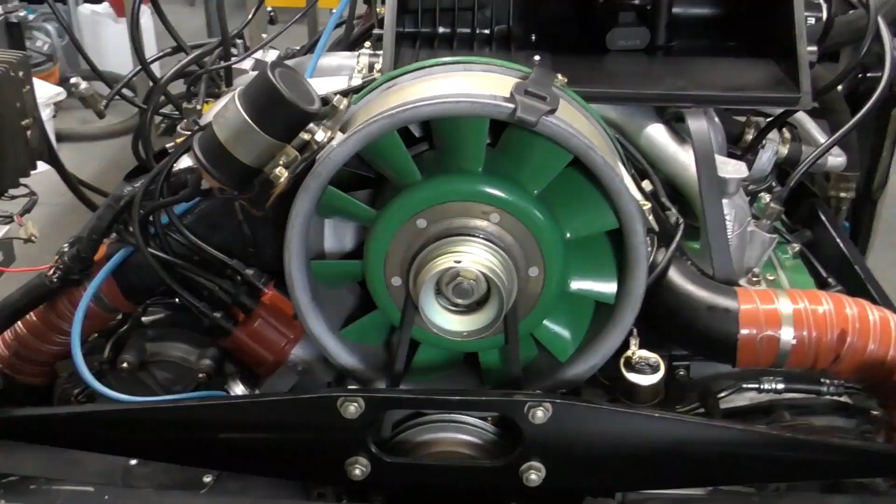So the purpose of this is to show you how to diagnose problems with the CIS fuel system. So a little bit of background, this is an engine that we just built. It is a 2.7 liter engine, and we started it for the first time yesterday.

Now, when you do a first startup, often you're fighting a lot of things, so we didn't want to get too bogged down with the fuel injection system. What we have done so far is the engine is a complete rebuild from the case out. New pistons, cylinders, heads, everything's been machined.

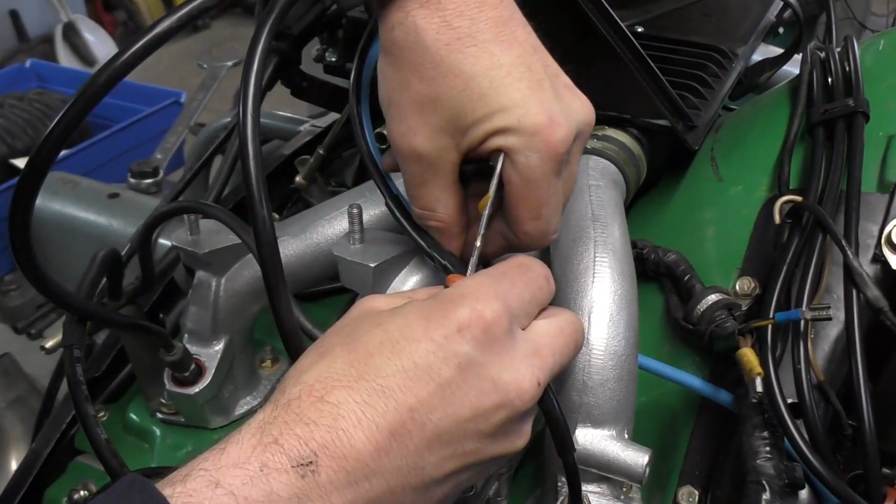The fuel injection system, we've gone through, resealed it, though we haven't had any work done on the warm-up regulator or the fuel distributor. We've set up the CIS sensor plate, our throttle bodies, vacuum lines, and we've also tested our auxiliary air slide. Now, the problems that we had once we got this engine up and running were fourfold.

So, those problems were a high idle. We had a rough idle as well with a partial misfire, popping in the exhaust, and then finally when I tried to lean the fuel mixtures out, the engine running would get worse.

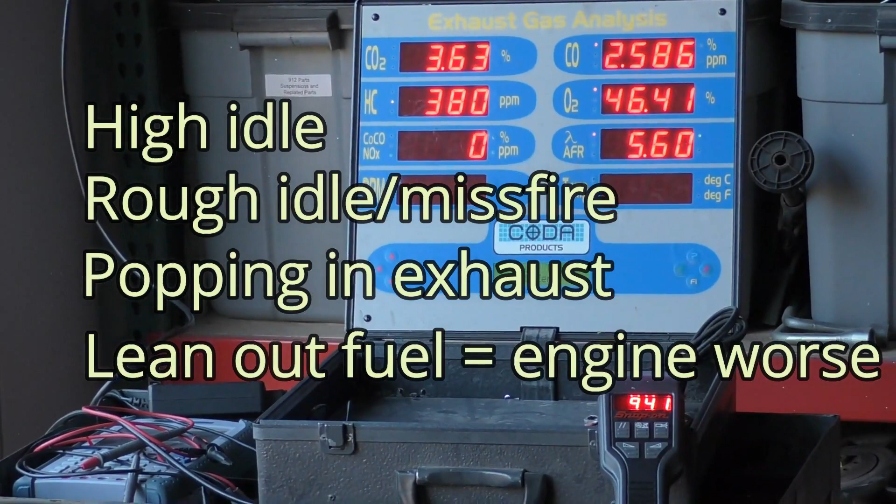So what I did first, because as I said, it is a new engine, but just because it's new doesn't mean anything's right. I identified where our cylinder was on the misfire by cracking our bolts on the fuel distributor. When they're working... No change on that cylinder. If you crack each one at a time, it will drop that cylinder because it drops the pressure to the fuel injector. So we located cylinder number 2 as a problem.

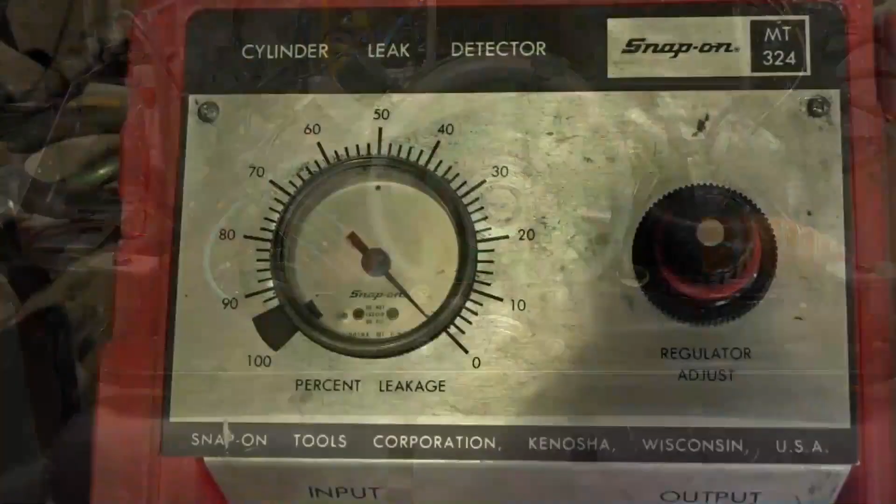We went through the basic diagnostics setup, which is check leak down for engine mechanical first. Leak down pressures were great. They came in at around 6% leakage, which is great for a brand new engine that hasn't even been bedded in yet. Then the next thing I checked was the ignition side of things.

Once again, new ignition cables, new cap, new rotor, that doesn't mean anything until it's been verified. Check the resistance on the plug connectors, check to make sure the wire was plugged in and everything was hooked up correctly, which it was. So what we're going to do today is go through and show you how we're going to chase down the problems and see if we can identify what's causing each problem one by one.

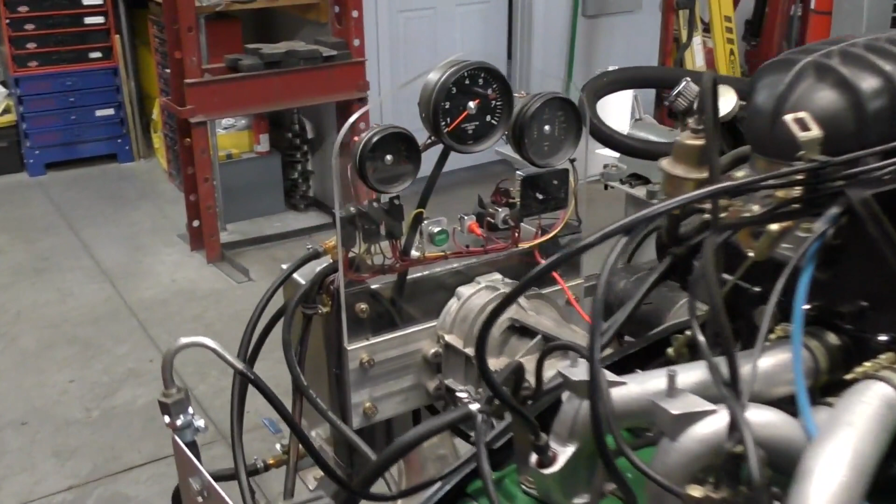So the very basis of the CIS fuel injection system is pressures. And to check our pressures, we need our pressure gauge installed, but we also need to, when you're in the car, run the ignition. Now, on my engine test stand, I have my fuel pump and my ignition system isolated, so I can run just fuel pump or just ignition if I want to. But I want to show you how I would start testing this system as if it was in the car.

So, the first thing that I want to do is have my engine cold, so let the car sit overnight. Then I want to come to my warm-up regulator first. And this is our bimetallic strip heater. I want to go ahead and make sure this is unplugged.

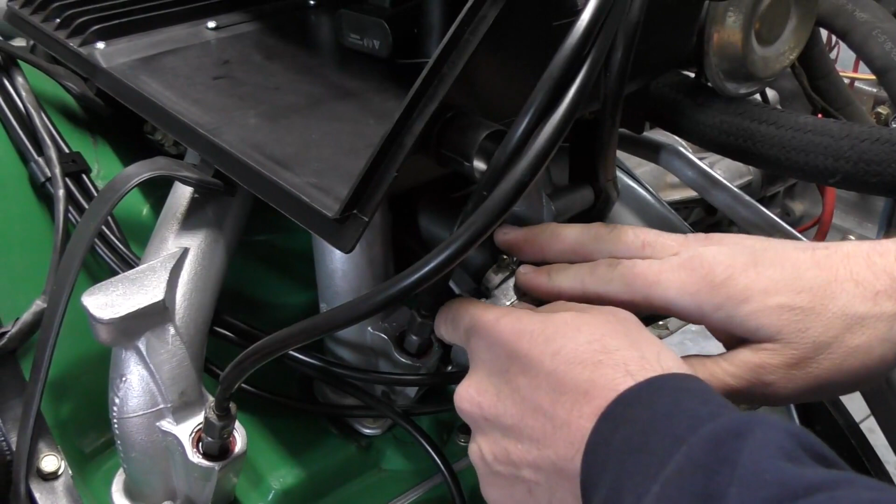Now the next thing I also want to do is come over to my auxiliary air slide, which is right here. Because when you turn the ignition on, this is going to begin heating. And we also had a high idle, so I want to make sure that this component is getting the right power and ground signals. We tested this on the bench. We know it's working correctly. So now we've got to check to make sure that it's getting the right power signals.

So these can be a little bit difficult to get out. I've unplugged it and I'm just going to pull it forward. Now, since I've got these unplugged, I'm going to take the opportunity to test to make sure I've got good power and ground at this plug.

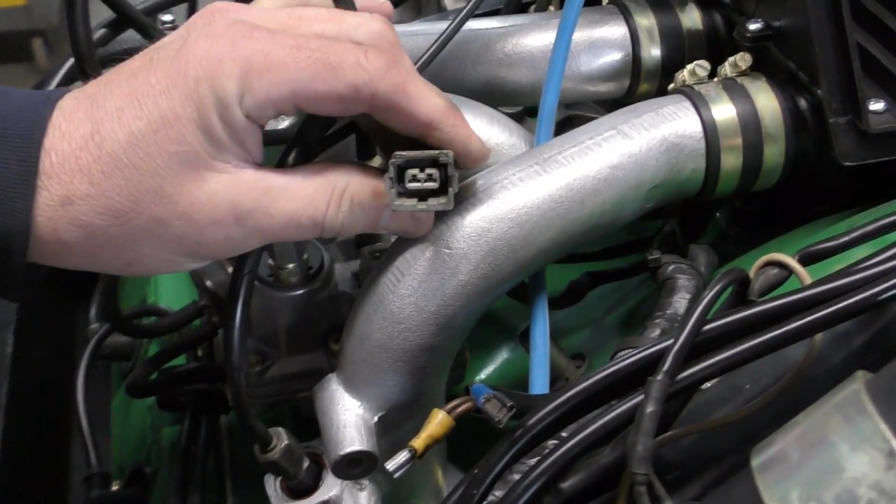There's two ways you can do this. You can use a voltmeter, go across these two terminals, and that'll show you whether or not you have a power and a ground. Or I'm using a little fuel injection tester. This is a standard Bosch LED. Plugs in like that. I'm just going to flick my ignition switch on and it lights up. So I know I've got power and ground at my warm-up regulator. So I'm going to take this over to my auxiliary air slide next and do the same thing.

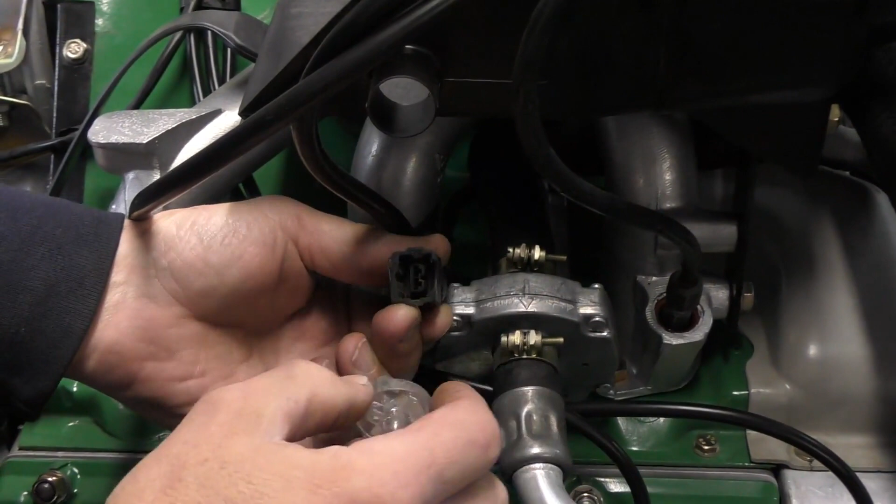And then once I plug this in, we can see instantly that we have nothing there. Now I can also feel that the plug, something's going on, and when I look into the plug I can see somebody's pushed the terminals out. So I'm going to have to pop this apart, see where the wires are. I can feel the wires in the boot, so something's gone on here where maybe somebody stretched this connection, they've broken the terminals and they've come undone.

That will cause our auxiliary air slide to stay open, which will also cause our high idle complaint when the engine gets hot. So just doing that little quick check there, we've already identified one of our possible problems. So I just popped the plug off, and it looks like our terminals have popped out. Possibly somebody trying to yank on this because it's kind of tight in there. There's not a lot of room to work. And the wire stayed still and the terminals came out.

So I'm just going to see if I can find the locking tabs, bend them up a little bit, reinsert, and see if we can get this slide working. Okay, I got them to clip back in. I can see the plugs right here. Grab our little test light and check to make sure we got power and ground here. I'm just going to plug in our little Noid light.

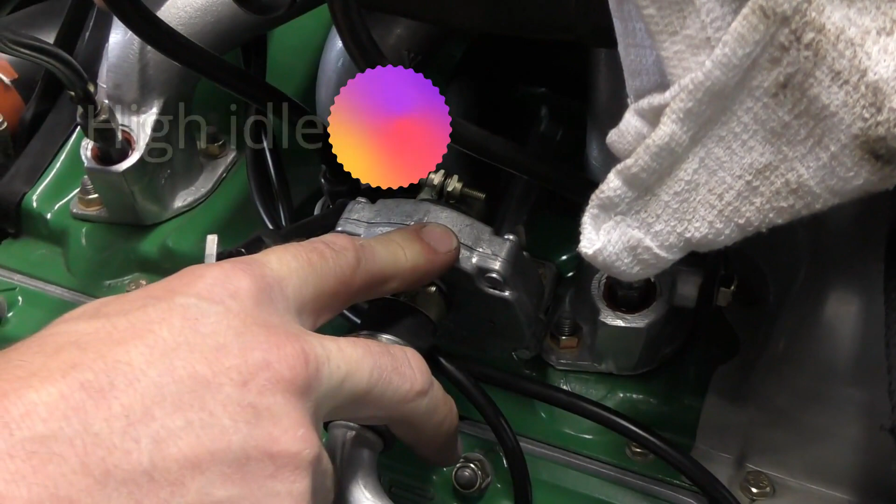And now we've got power at our auxiliary air slide. So this should now power our auxiliary air slide, which will cause the opening to close off the auxiliary air on warm running and should solve our high idle issue.

Before we start testing our fuel system, we want to identify the warm-up regulator. What we're looking for on our warm-up regulator is the Bosch number. Let me just pull this off of here to make it easier to see. The number is stamped or cast into the warm-up regulator. The first number, the 0438140, represents a warm-up regulator.

The number that we are interested in is the 033. This is going to be the model number of this warm-up regulator. This can be used on several different engines, and there is also often 2 or possibly 3 different warm-up regulators based on supersessions. But we need to know what this number is so we can compare it with our graphs.

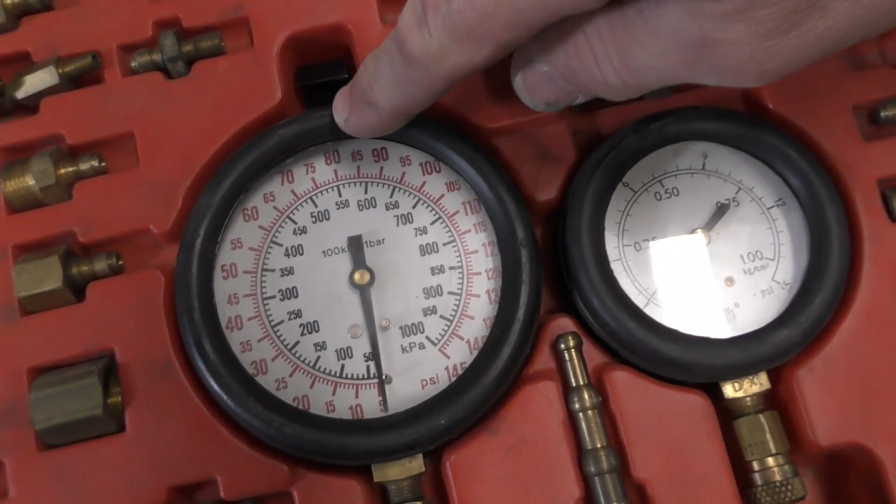This is the fuel pressure gauge tester that we use. This has a lot of different adapters that will do different vehicles, different hose kits, 2 different pressure gauges. This is our pressure gauge that we will be using. These systems run approximately a 70 to 75 psi fuel system, or 5 to 5.5 bar. So you need to make sure the gauge is going to go up to at least those. Generally I want to be using this top part of the gauge. It also comes with another lower gauge and a bunch of different connectors.

So we're going to connect our fuel pressure gauge in between our fuel distributor and our warm-up regulator. Now you can connect at either end, it doesn't really matter. I'm going to go in right here at my fuel distributor. So I'm just going to crack the top line here. You want to make sure if the car's been run that it's been able to sit for a couple of hours so it cools down. Also want to be careful when you unscrew it that there's no residual fuel pressure. It might spray, in which case cover it with a shop towel.

So I'm just going to unscrew this line. So I'm going to attach an adapter fitting into our warm-up regulator line, and then we'll grab a wrench and tighten this down in a second, and then I'm going to pull this adapter out so I can slide my long adapter in to the top of the fuel head.

So when I connect my fuel pressure gauge connection right here, I'm going to tee off to my actual pressure gauge. You want to make sure that you have a tap, and the placement of this valve is very important, because to be able to check system pressure and control pressure, we need to be able to shut this off to check system pressure and then open it to check control pressure.

So when I plug this in, the pressure test port needs to be closest to the actual fuel distributor, and then the warm-up regulator side is going to be on the shut-off valve side. If you reverse this setup, when you shut this off to check system pressure, it will actually only show you whatever control pressure you have. So that's one tip you got to kind of watch.

So before I get started, I've spilt some fuel in this area. I'm just going to take my compressed air and blow that fuel away. It'll evaporate pretty quick. Now we want to make sure when we're testing we don't have any fuel leak from any of our adapters, so I need to eliminate any issues of fuel right there.

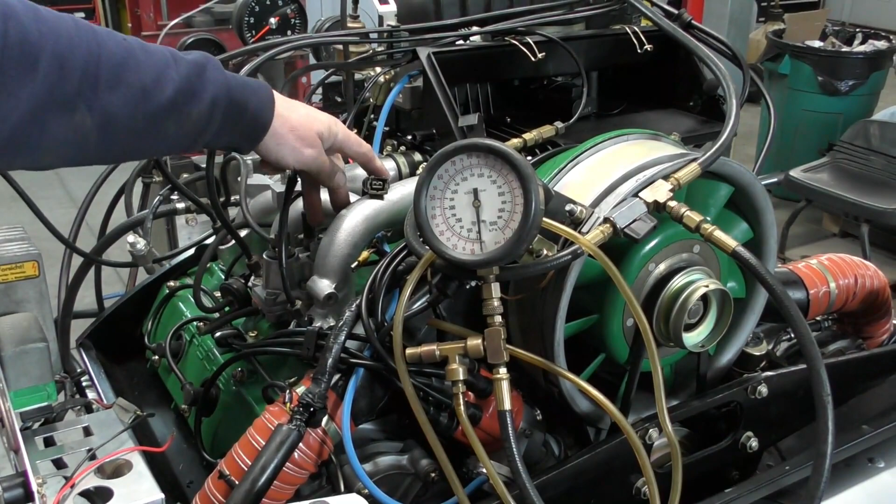Throughout the entire test on a warm-up regulator, you need to make sure that the electrical connector is disconnected. Otherwise, it'll be changing our fuel pressure. Now, the next thing I'm going to do is I'm going to take my Raytek temperature gun, and I need to get an accurate measurement of what the actual warm-up regulator measures. And I've set it to degrees C, just because all of the Porsche information is in degrees Celsius.

So right now it's 17.8, so I'm going to call it 18 degrees C, which should be your ambient air temperature. But it's very important that we need to know exactly what it is, because we're going to compare it to our tech information that has a graph to where the fuel pressure should be.

So next I've gone to our shop manual, and just to show you, each different warm-up regulator number has a different graph. So this is why it's important that we identify which one we're working with. So on this one, we are on a 76 2.7 liter engine, so I'm covering 76 and 77 models. It'll give the factory Porsche numbers here, followed by the Bosch service numbers. So the number we're looking for is 0438140033, so that's our warm-up regulator.

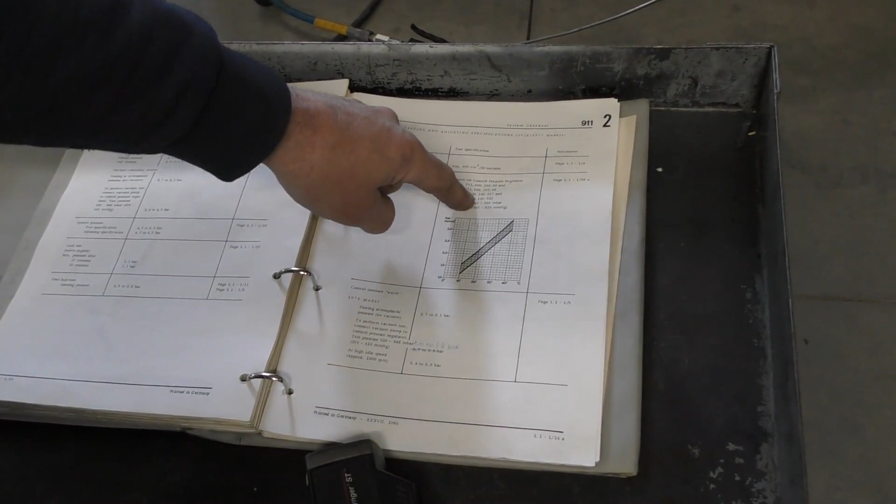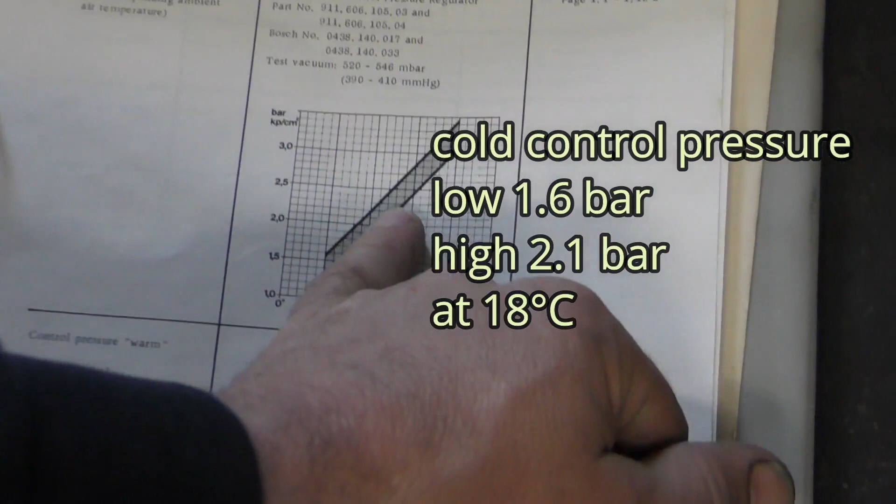We have taken our temperature using a Raytek temperature gun at 18 degrees. So if we come to our graph, follow it up, it's going to show on the low side and high side. So there's a pressure range that we can be in. On the low side, we are looking at about 1.6 bar. On the high side, we are looking at around 2.1 bar. So we're going to run our fuel pressure test first and see what our warm-up regulator comes in at.

So I'm just going to run my fuel pump, let our pressure build, and right now we are running at about 1.3 to maybe 1.35 bar. So we're actually running on the rich side for our warm-up regulator cold for the temperature that it should be. So the lower the control pressure, the richer the engine will be.

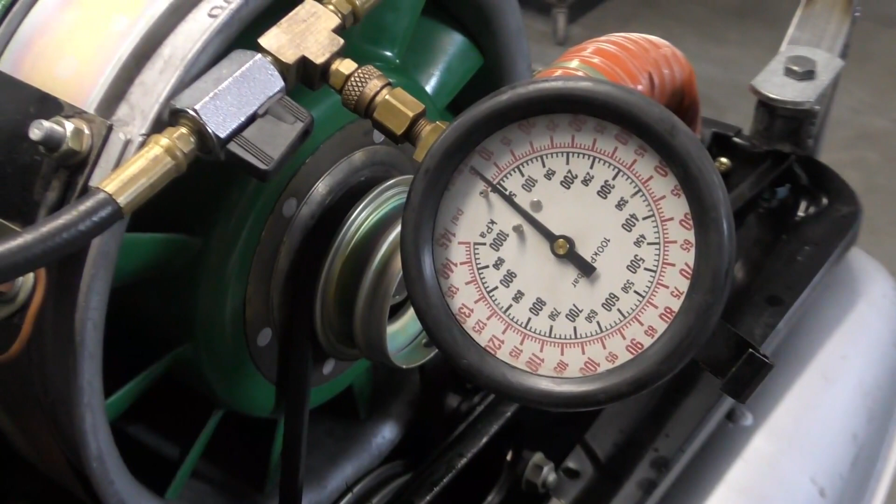The control pressure is working on top of our piston on our fuel distributor. So the amount of pressure in this line dictates how much that sensor plate will lift and how much fuel will actually be injected into the engine. So when the number is really high on our warm-up cycle, that will create a lean misfire or a lean engine. If the number is really low, it will create a richer running engine.

So these are calibrated numbers. There are some small adjustments that can be made, but I don't recommend it. We can usually lower pressure by dropping this center pin, but usually it's better just to have this unit repaired.

Next thing I want to check is my overall system pressure. So to do that, I'm just going to close the valve. My system pressure is coming in at just under, it's about 5.3 bar, and we'll check it against the spec, but that sounds about where it should be. And I'll open this, it should drop straight back down to my control pressure, 1.3 bar.

The next thing that we want to do is we want to check to make sure that the hot running pressures are within range. Even though we know the cold pressures are not in range, it's on the rich side. And you may also make a decision if the car starts and runs well, if the hot pressures are all good, then you may leave it that way.

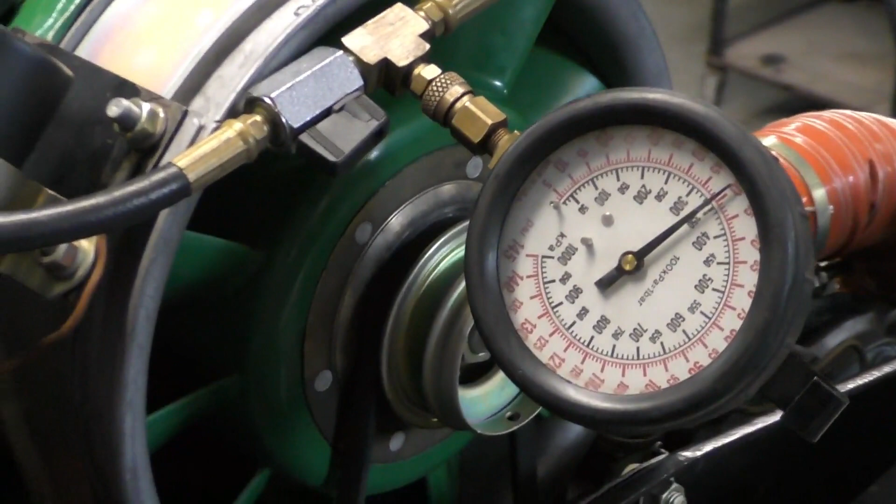Minute and a half, we're at 3 bar. Two minutes at 3.5. Okay, looks like it's stabilized at 3.5 bar or 50 psi. We've been 2.5 minutes, so we're pretty much right there, coming up to the 3-minute mark right now. We're going to leave it connected and just make sure it doesn't climb any further, but it looks like it's pretty well stabilized. That's 3 minutes.

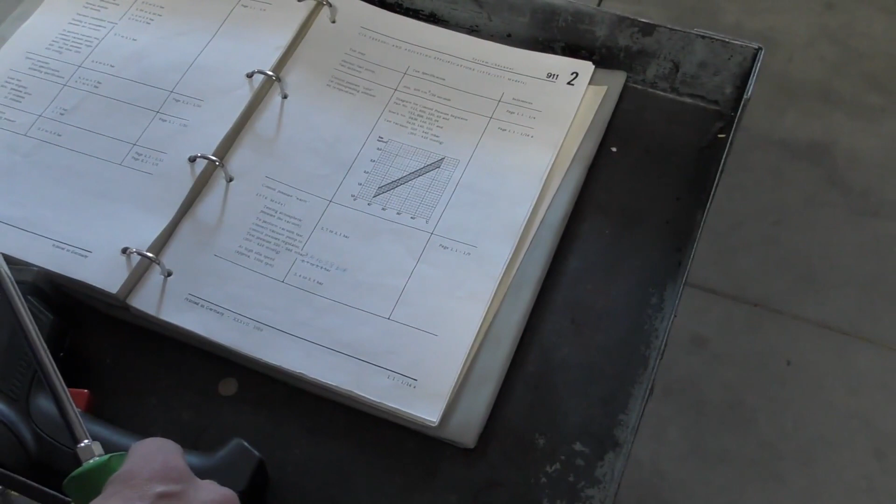So testing without vacuum, we should be, no vacuum, 2.7 to 3.1 bar. So the warm-up regulator is actually a little bit higher. It's coming in at 3.4 bar, 3.5 bar, so it's about 0.4 of a bar too high. That will make it a little bit leaner in that range.

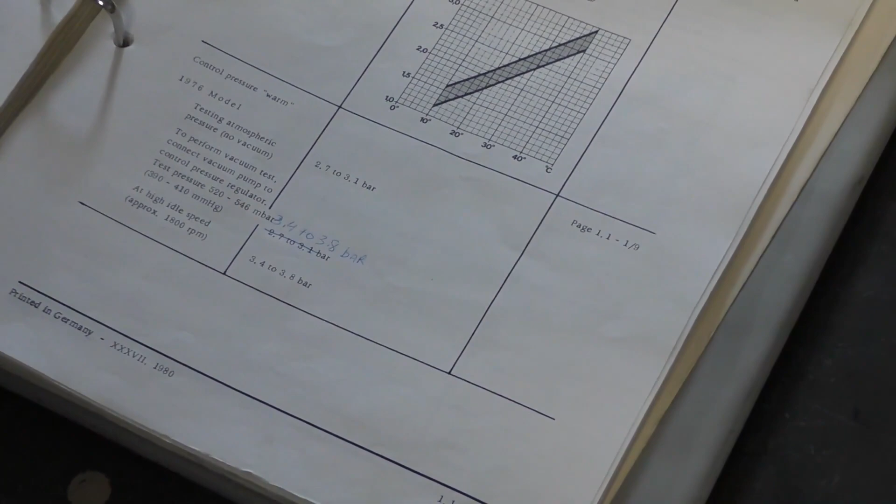So what we're looking at here is what's called rest pressure. And rest pressure is when we shut our fuel pumps off and the system should maintain a certain amount of pressure for a certain amount of time without completely dropping by the wayside. Now this is measuring a couple of things. It's measuring the check valve or the pressure control valve in the back of the fuel distributor. It's also measuring the warm-up regulator. There's usually an accumulator and a check valve in the fuel pump.

Now on our test stand here we are not running an accumulator. Normally it would be mounted right in front of the fuel filter; we're just bringing it straight from our pump. So what we're measuring here is the check valve in our fuel pump, which is holding nicely, and the pressure control valve in the fuel distributor, which is also holding nicely. And what we want to be looking for is minimum 1.3 bar after 10 minutes, and then after 20 minutes, minimum pressure of 1.1 bar.

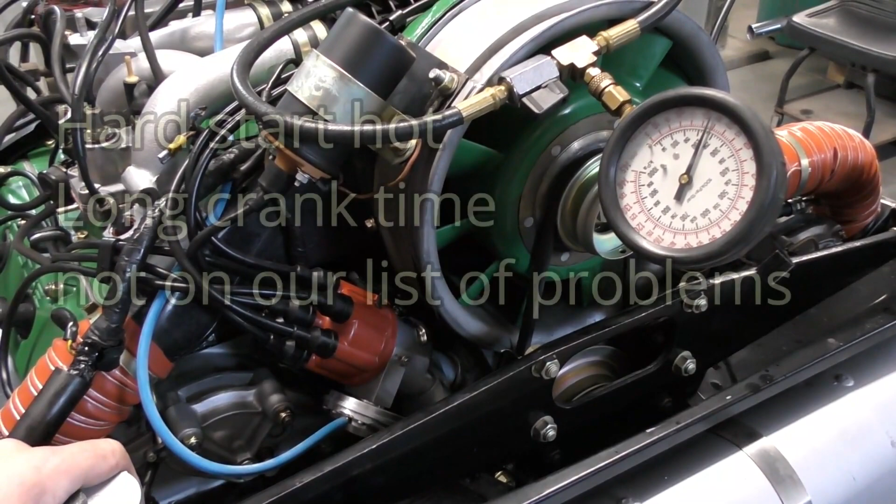So I just took a glance at the clock right now. It's approximately 8 minutes after the hour. So we'll let this sit for 20 minutes and see what our pressures are. Sitting at 10 minutes and we're sitting exactly at 1.3 bar. So far everything's working well.

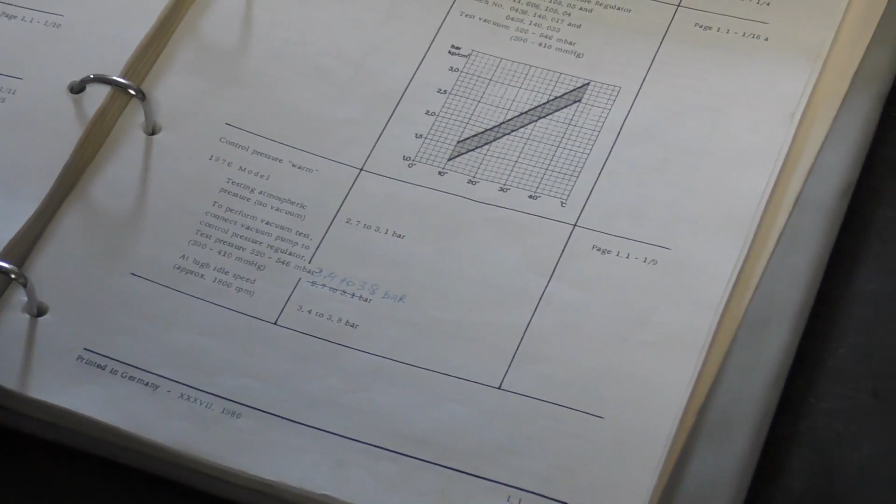The next thing that we need to do is check our pressures under vacuum. So we're going to do a vacuum test and then a high idle speed vacuum test. Now we're going to simulate the engine vacuum by using our vacuum pump, because we're not going to run the engine. You can do it either way. If you don't have a vacuum pump, you can connect everything up and run your engine and get these same results. So we've got two vacuum tests to perform.

We have our ported manifold vacuum on the top, and this one is designed to increase control pressure. It should increase it to approximately 3.4 to 3.8 bar. And this is to lean out the engine at high speed running, where we're not under load so much, we've just got a lot of airspeed moving through our throttle housing.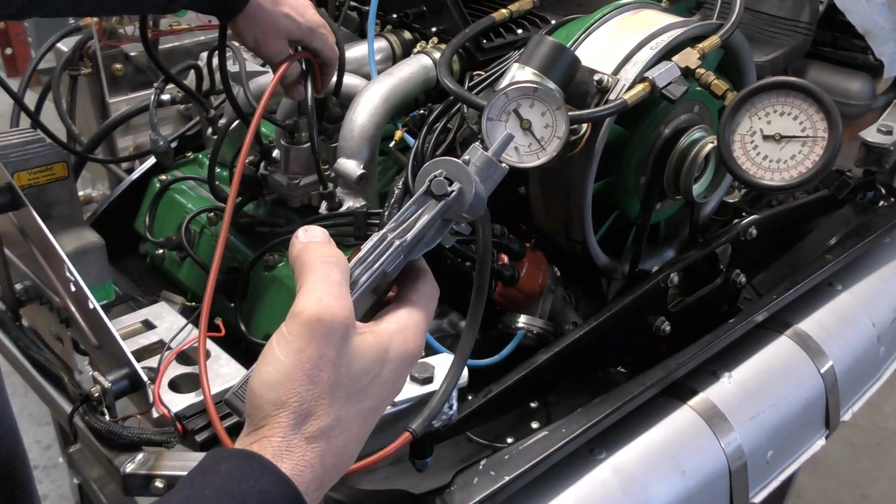So I'm just going to simulate it with my vacuum pump, and as I start to pull it up, you can see our pressure comes up to about 4.5 bar. And our vacuum gauge is also not holding vacuum. It's slowly bleeding off. So that means the diaphragm inside here is not holding. And as our vacuum bleeds off, you can see our pressure slowly dropping.

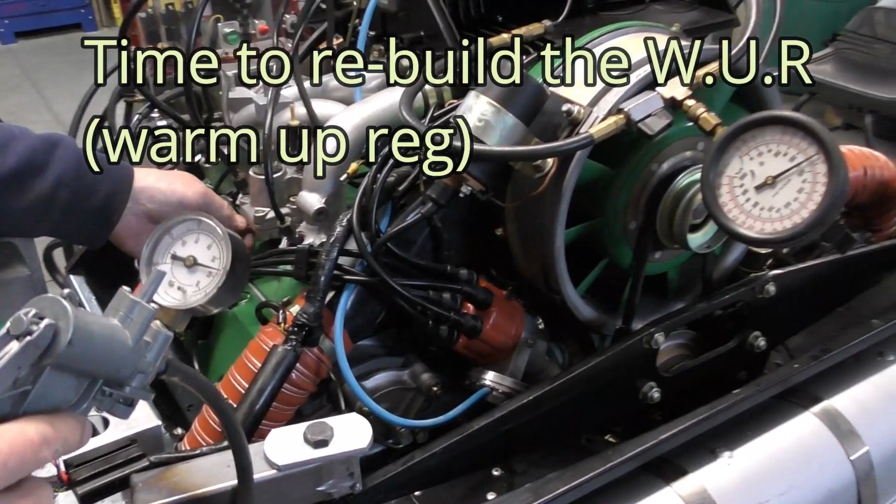Then our fitting down here is an enrichment fitting. So when I give a manifold vacuum signal to here, it should decrease our control pressure, and it's actually making zero change to the warm-up regulator. It is holding vacuum though, so the diaphragm's good. It's probably gummed up or frozen up in there, so it's not moving correctly. So our warm-up regulator is out of spec in pretty much all facets of operation, so it needs to be rebuilt.

So we've gone through and done pretty much all of our preliminary pressure testing, and the one number that is out of spec that we can change is system pressure. And then we can re-look at our numbers and see what effect it had.

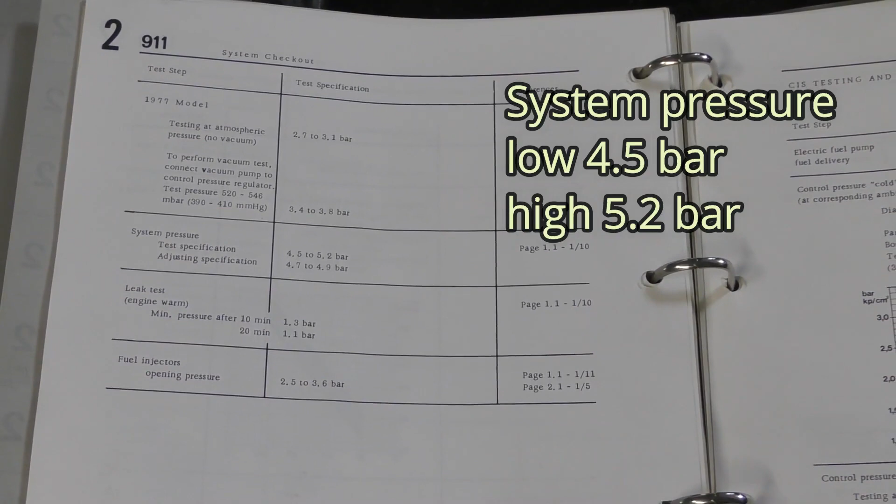So our system pressure should be between 4.5 to 5.2 bar with an adjusting specification of 4.7 to 4.9. What that means is if you measure the pressure and it's 4.5, then that is totally okay. You don't need to make any changes. If you measure the system pressure and it's 5.2 bar, that's also totally okay. But what they would prefer is somewhere between 4.7 and 4.9 bar. So let's look at how we would adjust our system pressure.

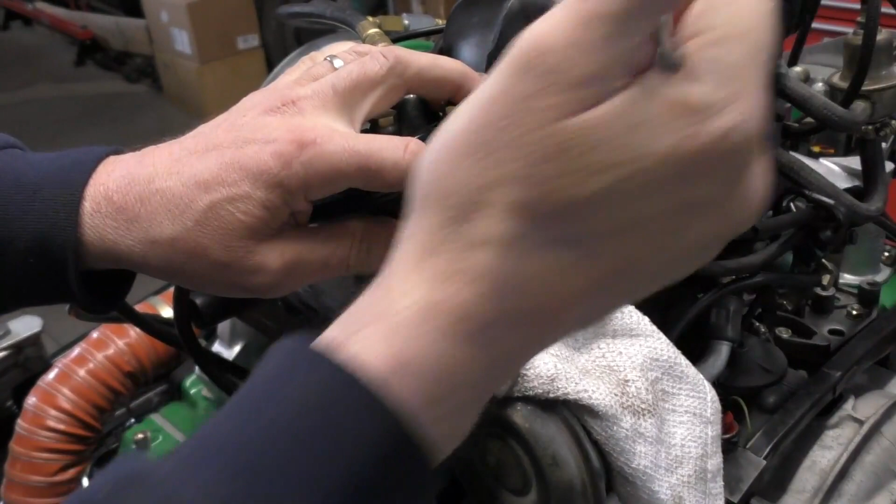System pressure is controlled by a pressure control valve mounted in the fuel distributor. Inside here is going to be a spring and a piston, and this is what controls our system pressure. To change it or to look at it, I'm just going to put a shop towel, going to undo it. Be careful that you have released all the fuel pressure.

And when this comes out, it's going to have a copper seal ring, a pressure spring. There should be shims down in here. And then I'm just going to use my magnet to bring the piston out. And a piston with an O-ring. Now this O-ring on the end of this piston can also be responsible if you have poor leak down numbers. So if you switch the key off and the engine fuel pressure leaks down very quickly, if this O-ring is damaged or cracked, then it will cause your leak down pressures to fail.

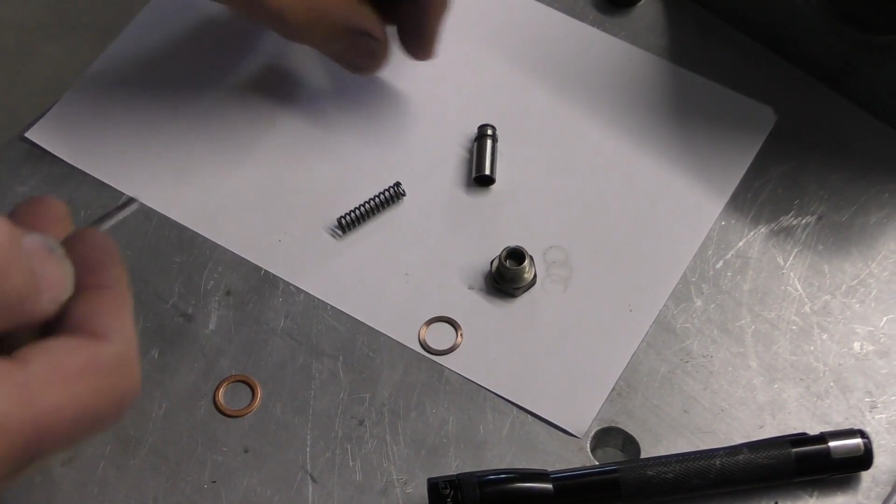Now normally there would be a shim located right here in this bolt. Doesn't appear to be any in this one. I've tapped it out a few times, hit it with my magnet, and nothing's come out. So I can't remove a shim to decrease my pressure. So what I'm going to do is, this is the original copper sealing ring. I'm just going to measure that. This one measures in at 0.73 millimeters.

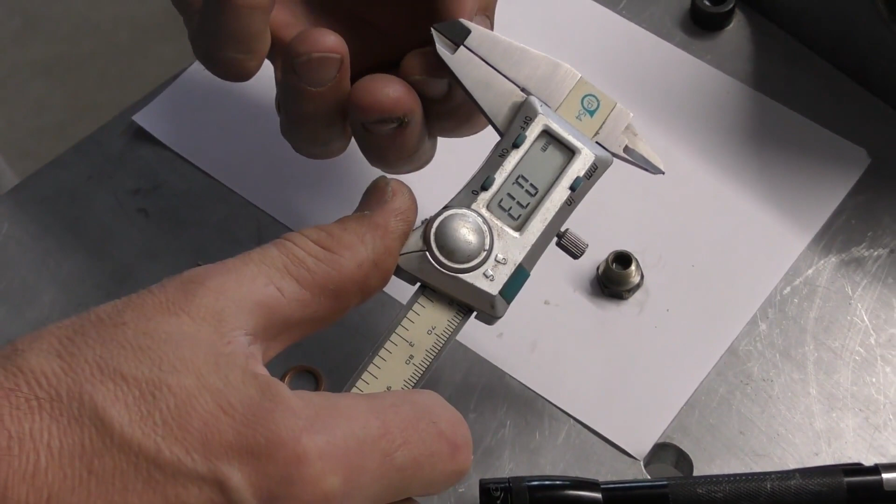I've gone through our copper sealing ring assortment, and I've come up with one that's measuring 1 millimeter. So that's going to move this spring purchase back by 0.25 millimeters more than the original copper sealing ring. So I'm going to go ahead, put that new sealing ring on.

I want to make sure that this is completely clean. There's no debris, no heavy scoring. This needs to be able to move freely. You want to be very careful with these. You don't want to use any kind of abrasive to clean them. A very light Scotch-Brite would be about it if you do have some mild scuffing.

So I'm just going to assemble the spring into my piston, grab my plug, and then put it back into the fuel distributor. So I've got my piston and my spring in, and tightened it down. So now we're going to check our system pressure and see what kind of a change it made. For system pressure, I'm just going to go ahead and shut my valve and turn my fuel pump back on.

And now our system pressure is just a hair above 5 bar, so it's knocked about 0.3 of a bar off for 0.25 millimeter of change and brought it back into usable range. So now I'll plug my warm-up regulator back in, we'll heat it up and see what difference it makes on the control pressure.

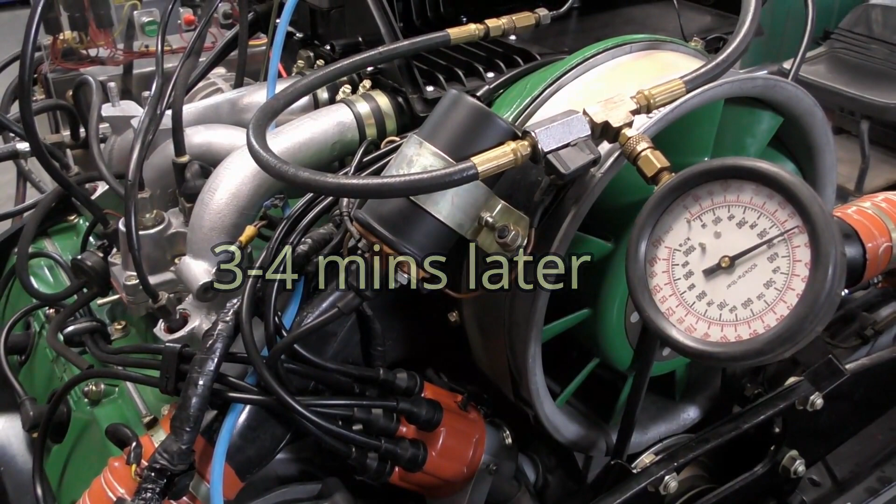So we can already see that it hasn't made any difference to our control pressure. We're still hovering right at 3.4 bar. So the warm-up regulator is still going to need to be readjusted.

So the next thing that we want to do is flow test our injectors and our fuel distributor. The way I'm going to do that is I'm going to use some graduated cylinders, and I've just got numbers on these. I use plastic ones, so if they get dropped, they don't break. These are fuel safe, and they are graduated in milliliters so that we can measure how much fuel is flowing

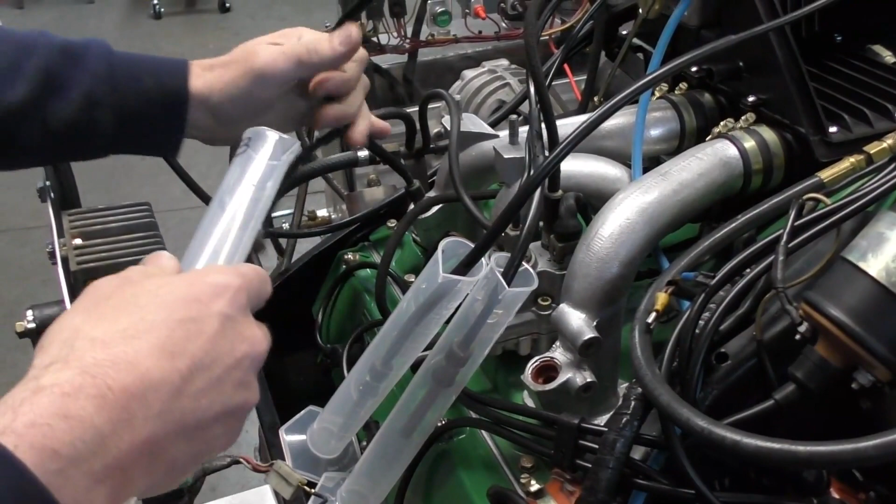on each individual cylinder. So to do this, all I'm going to do is grab my fuel injector. I'm going to pop it up with number 1, and I'm just going to drop it in our graduated cylinder. And then I'm going to do the same on the other side.

Next thing that I have to do, because the engine's not going to be running, because our fuel injectors are in our graduated cylinders, I need to lift the sensor plate. And the sensor plate, if we look down underneath, it has a little arm that pops down. And so to do that, I take a socket and I just slide that in so it lifts the sensor plate. Now, all this is going to do is inject a certain amount of fuel.

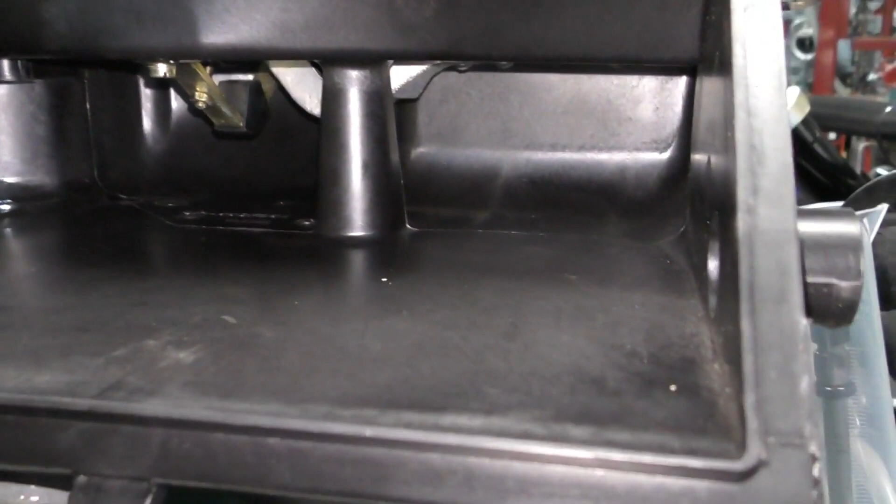We also don't care whether the engine's hot or cold when we do this test, because we're comparing the flow volumes of each cylinder, both the injector and the fuel distributor, to each other. We're not doing an actual volume test where we're looking for a set amount of fuel in a certain time.

So what I want to do now is I'm just going to turn my fuel pump on, and I should have fuel flowing. And as far as a volume amount, I just want to put enough into the cylinders, maybe 40, 50 cc's, just so I can compare each one and see if there's any differences between each cylinder. We can also take a look at our spray pattern as well if we want, because we have an opportunity to see the injector actually spraying fuel.

So I'm just going to turn it off now. I got enough in there to make some comparisons. Let's bring this one up to 50. And now all I'm going to do is line these up on my bench and see how they compare. So when we look at how much fuel is delivered from cylinder to cylinder, the biggest difference we see is actually in cylinder number 1. So there's the number 1 cylinder.

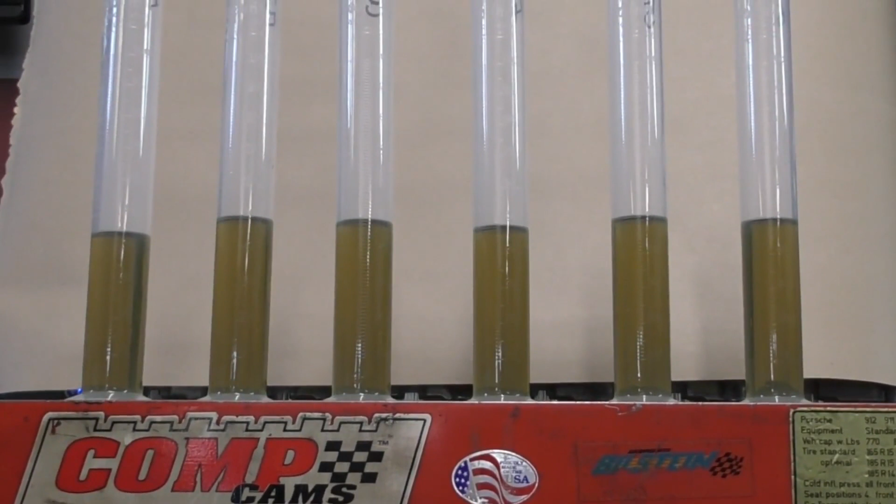Now, we were having a problem with number 2 cylinder when we were running the engine, and looking at this, our problem, if anything, should have been on cylinder number 1. Now, it is possible that we were supporting cylinder 1 with other cylinders and it's influencing it that way. So I'm going to go ahead and run this engine a little bit more, see if we still have the same misfire.

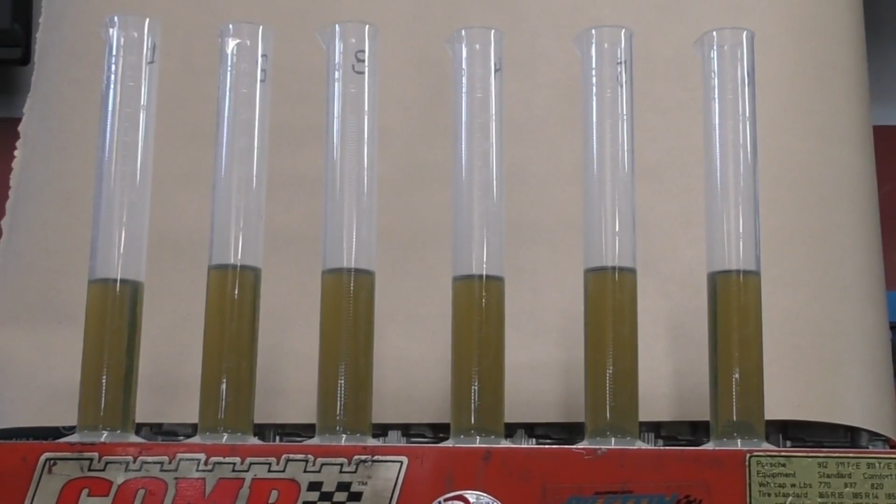Now, to confirm whether or not this is a fuel injector or a fuel distributor problem, what we can simply do is switch the fuel injector from cylinder 1 with whatever cylinder we want, 2, 3, 4, 5, or 6, and see if the problem moves to that cylinder. If the problem moves, then it's in the fuel injector and not the fuel distributor. If the problem doesn't move, then it's in the fuel distributor.

So I'm just going to switch cylinder 3, the injector, with cylinder 1 and see if it changes our flow rate. So we've swapped our fuel injector, and we're going to rerun the test. The same thing. We'll go to 50 cc's on number 3, which is what I was looking at when I shut it down, and we'll see if our problem has moved from cylinder 1 to cylinder 3.

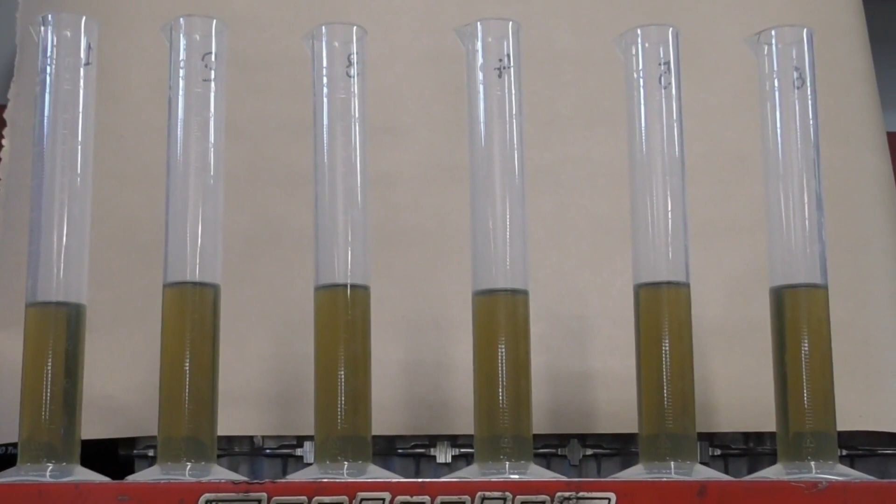So we just reran the test after switching injectors from cylinder 1 to cylinder 3. So if the problem was in the injector, cylinder 3, because that was the control cylinder that we filled to 50 cc's, should have changed all of the rest of the measurements. However, cylinder 1, which is this one, is still coming up at 45 cc's, and all the rest of the cylinders are still exactly the same as they were on the first test.

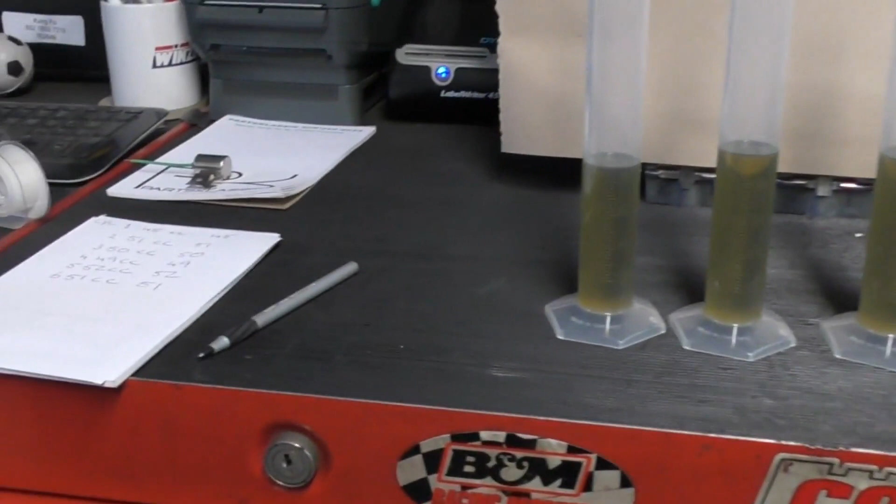So what this tells us is there is a restriction in our actual fuel distributor, and that is what is causing our lower fuel delivery on that cylinder. So the fuel distributor will need to be rebuilt. So I'm going to go ahead and restart my engine. We know we still have a problem with the warm-up regulator pressures and the fuel distributor, but I'm not too concerned with that right now.

The biggest thing I want to test and see is if our electrical repair on the auxiliary air slide corrects our high idle situation. I also want to confirm the misfire on cylinder number 2, because our fuel distributor shows a problem on cylinder number 1, not cylinder number 2, so I want to kind of delve into that a little bit deeper.

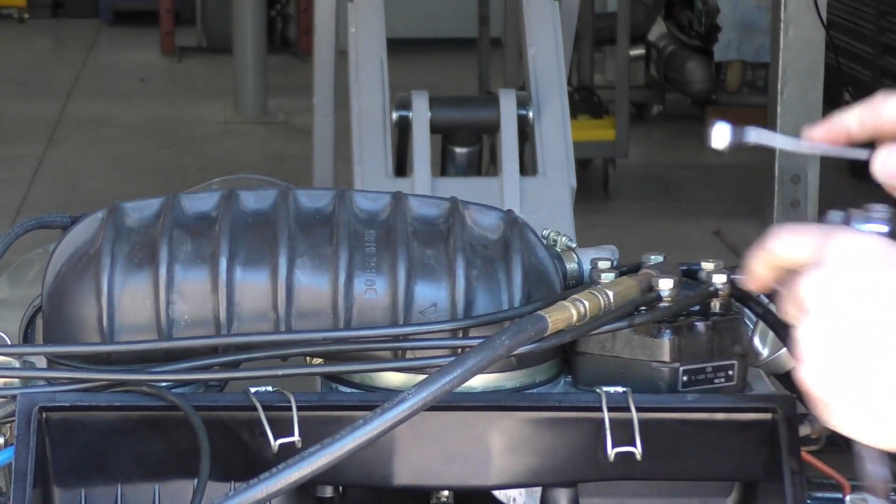So now that we've got the engine up and running, we can see that our high idle situation has been resolved with fixing the auxiliary air slide. The start was a little bit rough, but I'm not too concerned about that, just because we need to go through and do our tuning side of things.

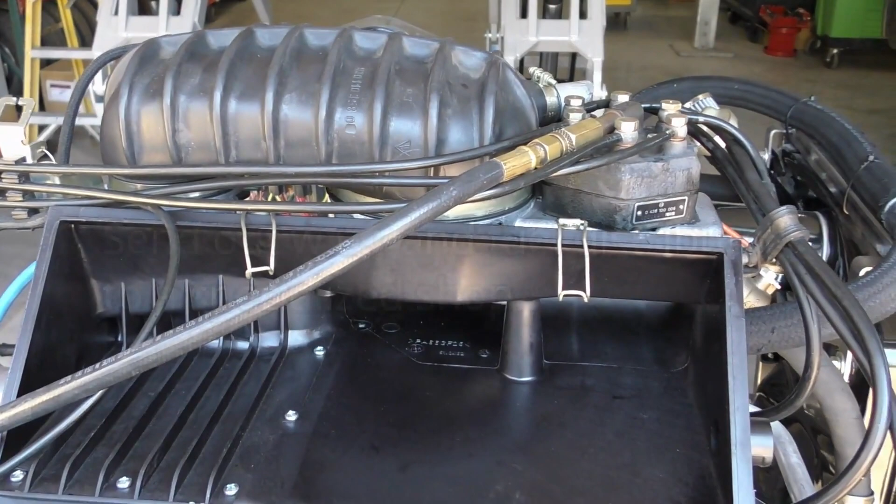Right now, the other thing that I noticed once the engine had run, and we've been running for probably 35-40 minutes now, I really wanted to get the engine up to temperature, was that my control pressure continued to climb even when I dropped off the vacuum lines. It was well outside of spec for what it should have been. So we're going to go ahead and pull the warm-up regulator, also going to pull the fuel distributor and send it out to be recalibrated.

Now I went through and redid where we were misfiring, and on the bench we showed that cylinder 1 was the low fuel delivery. And it was definitely misfiring on cylinder 1. Not sure what happened there, why I said it was cylinder 2 at first. But I'm going to pull the plug and do a leak down on that cylinder just to confirm that everything's okay in there as well.

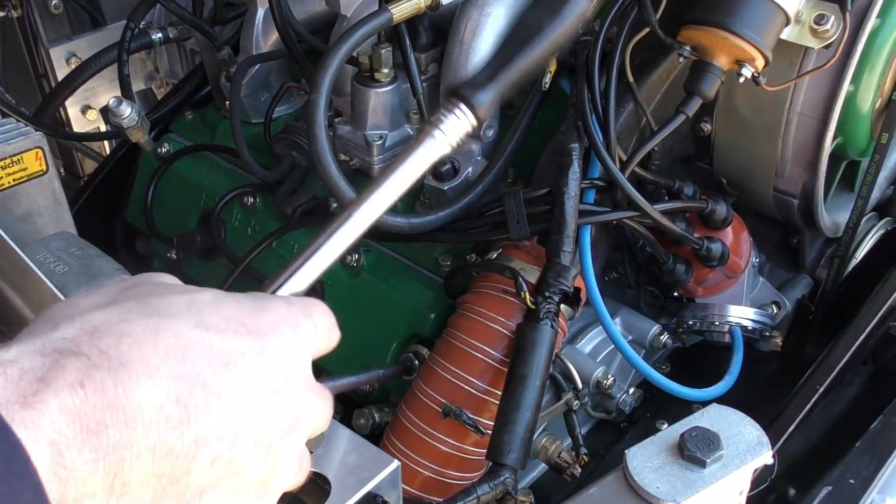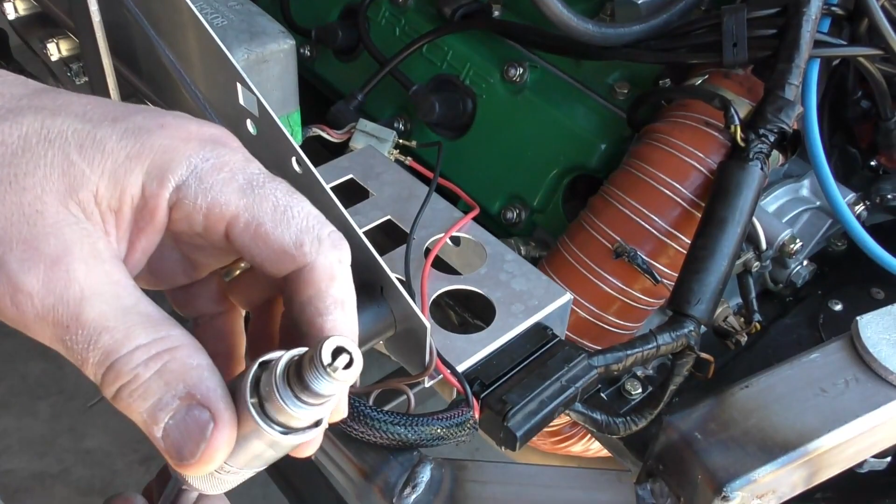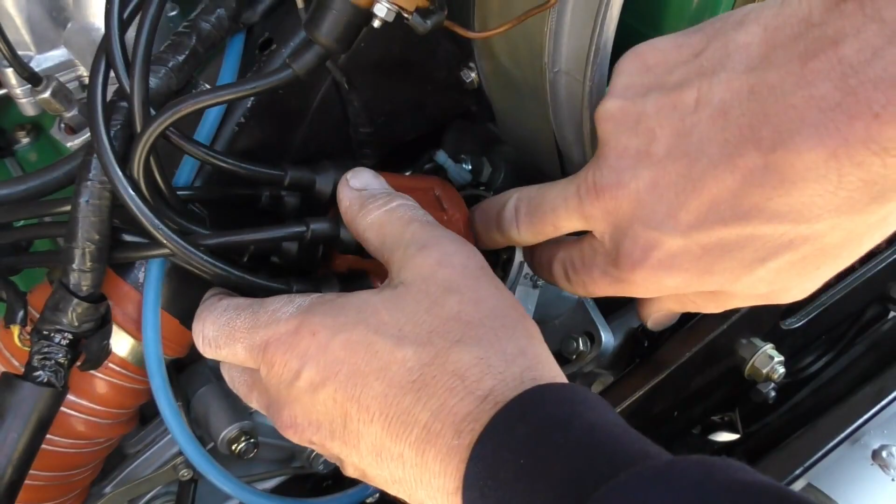I'm just going to roll it around to TDC number 1, and number 1 and number 4 are the easiest ones to find. I can set my TDC mark and then just pop my distributor cap off and see, luckily we landed up at number 1. Our rotor's pointing at number 1 spark plug. So that's a nice easy way to know when you're on top dead center.

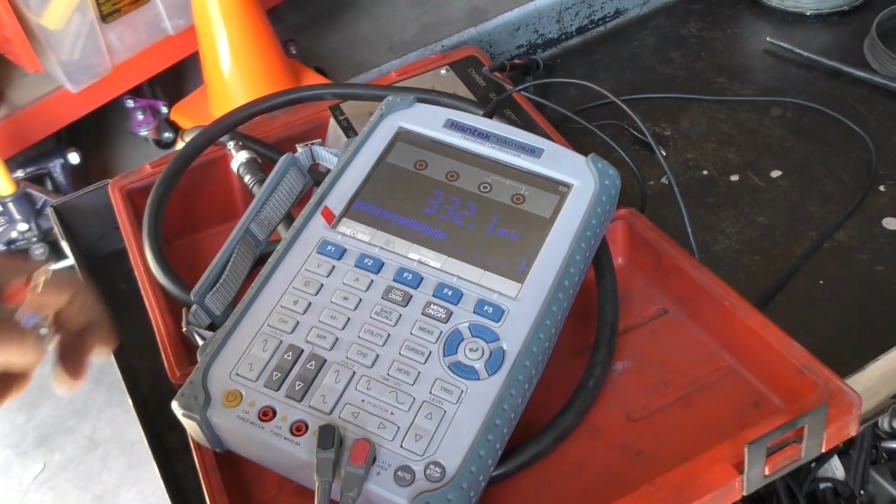So our adapter's in. We just zeroed our leak down tester. And our leak down is actually around 3%, which is really awesome for an engine that hasn't been bedded in. So I'm going to use my handheld oscilloscope. This is one of the best tools you can have on even early cars. Everyone says an oscilloscope is for a late model vehicle. That is totally not true.

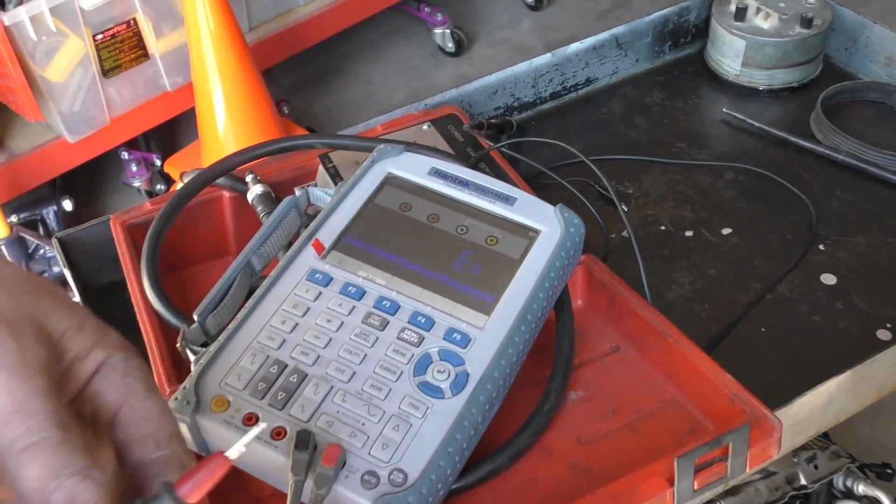This one does voltmeter as well as an oscilloscope. So right now I've already set it to digital multimeter. If I press the button, it'll switch back to my oscilloscope. But what I want to do is select ohms. First thing I do is check my cables, and they should have continuity, which they do.

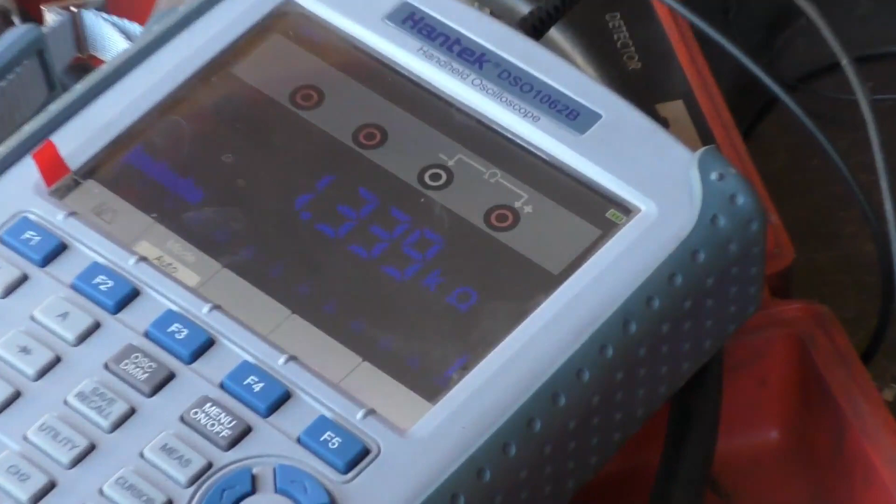And now I'm going to go grab my spark plug cable, and this should read around 1500 ohms plus or minus 10%. And we are at 1.3K, so 1.35, which is on the bottom end of the scale. Totally okay, we've got good continuity.

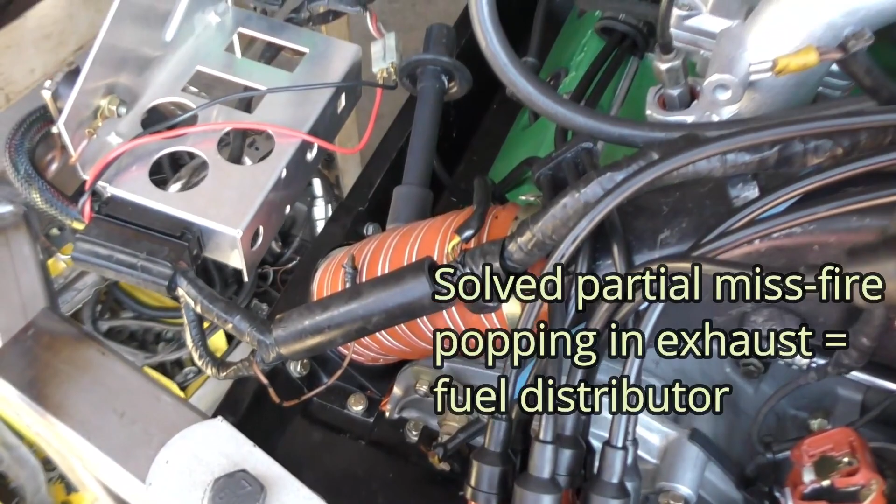So the wire isn't an issue, the spark plug isn't an issue, the cylinder's not an issue, but we do know our fuel distributor is an issue, being that it is about 6 to 7% down from the highest cylinder, which is enough to create a lean misfire. Now, the misfire that we had was not a total dead cylinder like a spark plug would give you, or a bad ignition wire, or no compression. It was a partial misfire, just means it wasn't running effectively. You could hear popping in the exhaust.

That little pump, pump, pump, especially when I'd lift the RPM up and hold it. And that was a cylinder that was not burning its fuel charge and was putting that into the exhaust, and it was igniting in the exhaust.

So when I start this for the first time after getting my fuel distributor back, and I do want to add one caveat, I have gone ahead and done the first service on this while our fuel distributor and warm-up regulator were out getting rebuilt. I pulled the upper and lower valve covers, I adjusted my valves, I did my rocker shaft torques, I did my cylinder head torques, I put a new set of upper valve covers on it because the old ones were the original magnesium and they were not sealing at all. I had a leak on both sides and it was very obvious on the gasket that it wasn't sealing.

So now when I start it, I'm not going to do anything in particular, just going to kind of crank it up, warm it up, and reset my fuel mixtures, and I expect it to be running fairly well.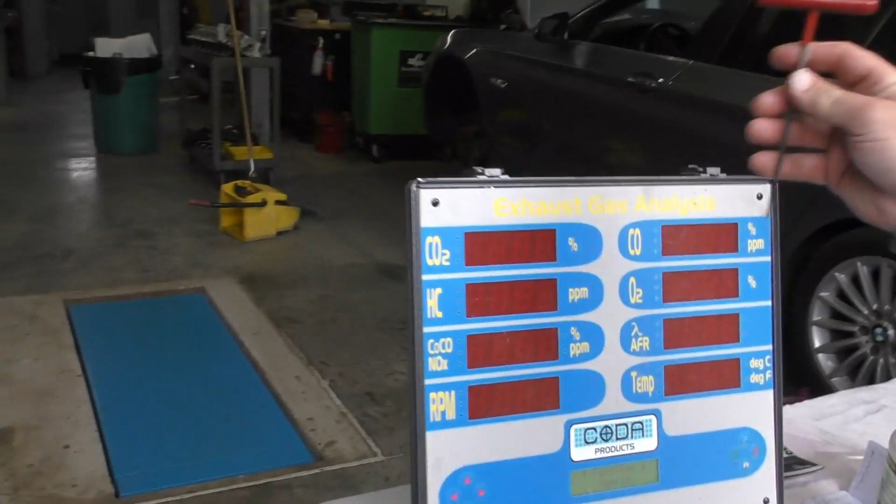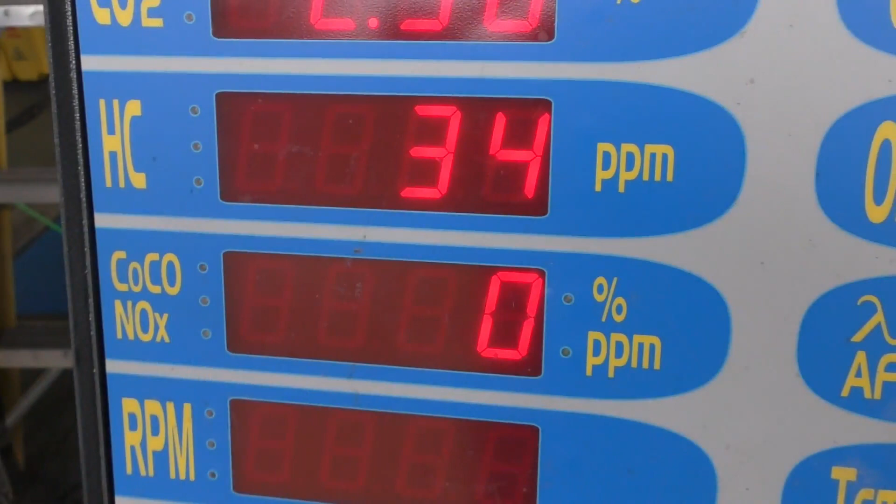Now, this is one of the important things where you have to have an exhaust gas analyzer. Now, mine has got a couple of issues. It's an older machine. I've had it for probably 20 years, and the oxygen cell calibration is old. So my O2, my AFR, and my NOx numbers are not accurate. What I am looking at is hydrocarbons and CO. Now, CO is the amount of fuel that I'm putting into the engine.

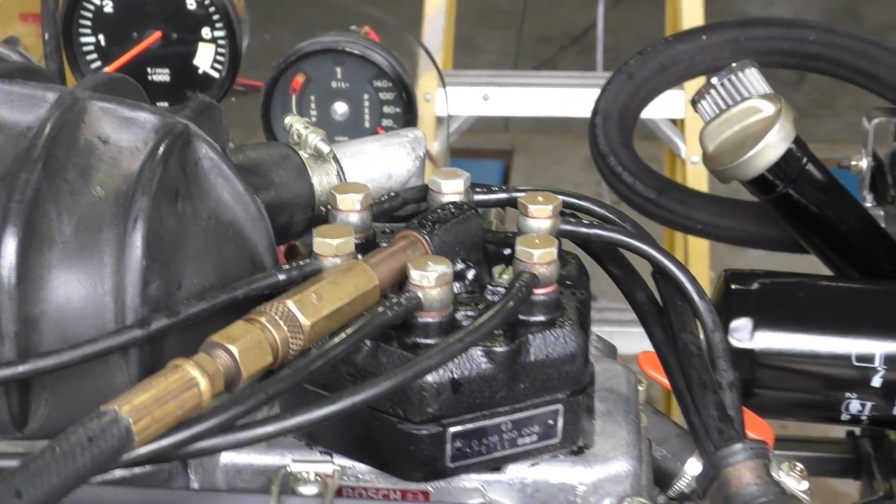Now, previously, whenever I tried to lower the fuel mixtures down, the engine would run rough, it would misfire, we were losing a cylinder is what was happening because the fuel distributor wasn't working correctly. We weren't getting equal amounts of fuel to each cylinder. Now I was able to set it at 1.6% CO. Engine is running really nice. I was able to drop the idle speed down a little bit and get it really stabilized out nice.

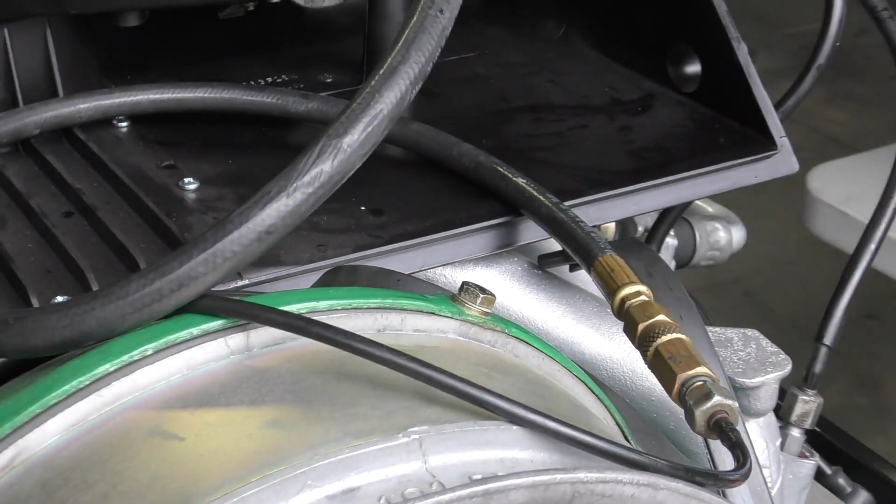Now the hydrocarbon number, that is a measure of unburnt fuel in the exhaust. The higher the number, the more fuel is being pushed out and not being consumed by the engine. So we want to see that as low as we possibly can. And at a couple of points there, I was seeing literally less than 100 hydrocarbons, which is way better than most modern vehicles today, even considering this thing doesn't have any catalytic converters or smog control devices on it.

So what I'm going to do next, I want to check my hot start. So I'm going to let it sit for about 20 minutes and I should be able to press my start button and the engine should start and fire and run pretty nicely. The next step is we need to let it cool down completely. Now we've got a fan on the back of the engine that's blowing some cool air over it, but it's still going to take quite a few hours for this thing to cool down, because we need to check how it's going to start cold.

Now ideally, the true test is going to be tomorrow morning when the engine sat overnight and is completely all at ambient temperature. But we can do a couple of tests today just to make sure everything is set, and then pick this up again tomorrow just to make sure our cold start is working correctly. Okay, so we're going to check our hot start. We've had the engine sitting for about 20 minutes now.

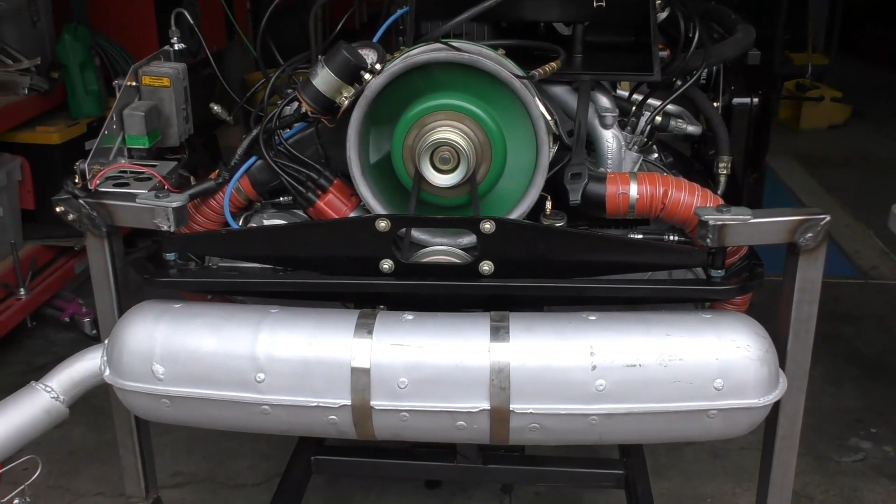Okay, so our engine started right up, didn't need any throttle, which it shouldn't if all your settings are correct. And I was just able to press the start button and it pretty much cranked a couple of times and fired right up, exactly what I want it to do. So we're going to go ahead and do our decel adjustment. Now when I rev the engine, it's returning to idle a little bit too fast, so I want to slow that down.

So you can see how the engine dips a little as it comes back to an idle, and that's because I'm letting the throttle plate snap closed. So our adjustment is going to be right back in here, and I've already got my lock nut loosened. I'm going to show you how we're going to adjust that.

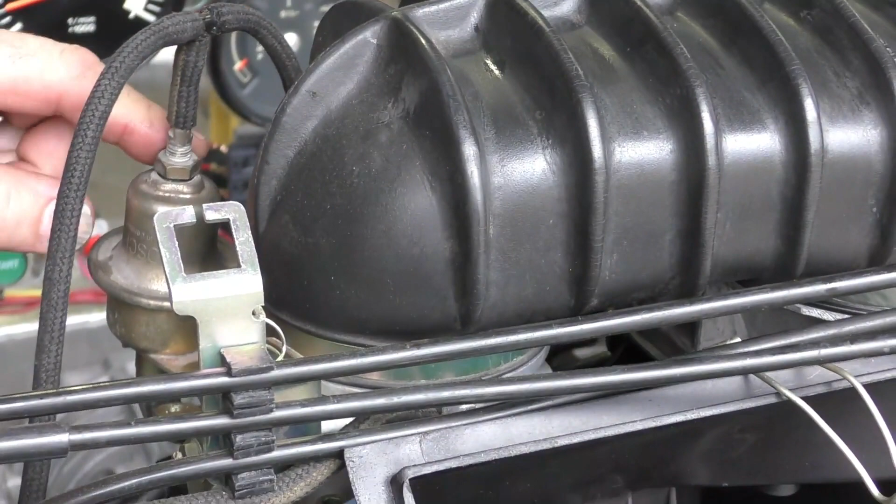So this is our decel valve, and this lock nut here is what stops the adjustment from moving, and this little center section here that's connected to our vacuum line is the adjuster. And what I'm going to do with a 6mm wrench is I'm just going to turn this. What it's doing is changing spring pressure on this unit here, and as I adjust the spring pressure up and down, when the engine decels, we get high manifold vacuum through our vacuum pipe that pulls up this valve and allows air to bypass the throttle butterfly.

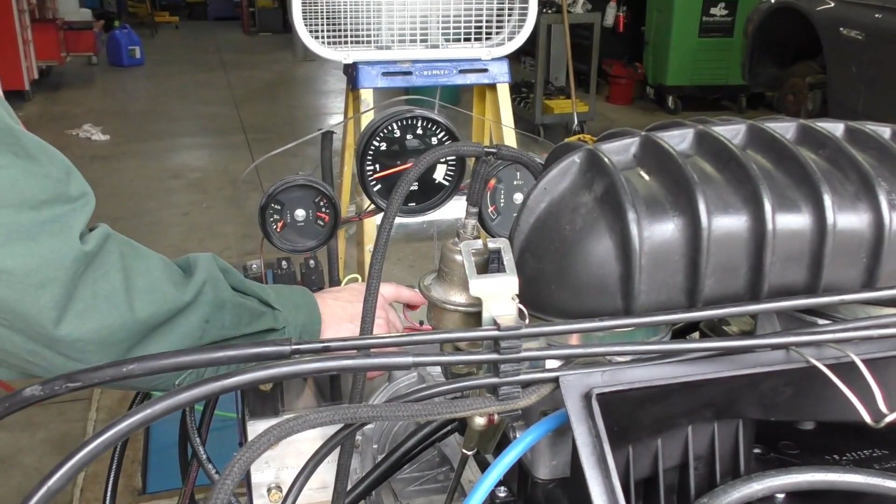So we're going to adjust that just until it comes back down to idle nicely. We want a slight bit of hang time. A little better. Okay. So this particular valve, even though we tested it on the bench and found it to be vacuum-wise operational, it is really not lifting as much as it should.

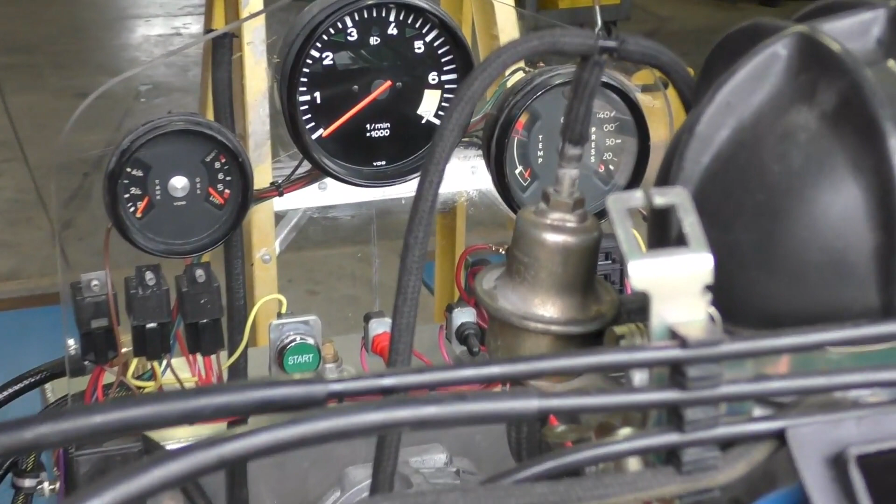So when I screw this out, this reduces the spring pressure on the diaphragm and allows our manifold vacuum to pick this up easier to open and hold open. And it's supposed to hold it open just for a little while until our manifold vacuum settles down and the spring pressure overcomes it. I've got it just about all the way unscrewed and it's better, but the valve is definitely not operating the way it should.

Now this is one of those parts where you can make a decision if you want to change it or not. If you notice stalling when coming to a stoplight, then that's going to indicate it's really going to need to be changed. For the time being, we're going to leave this one, wait till we get our engine back into the car, drive it, see how it responds, and take a look at it. It can be changed in the car, it's not a big deal, so for right now, we're just going to keep moving forward with it.

So when it comes to tuning the CIS system, as a mechanic, there's not a whole lot of things that you can control. Everything is pre-designed to operate in a set parameter. So the things that you can control and change are your idle fuel mixtures, which is done with a 3mm Allen screw straight down through the center, and very small adjustments here. You do need the gas analyzer to do it. Fuel pressures have to be correct. If your fuel pressures are not correct, then the rest of the system tune is going to be out of its calibration, and you're not going to have any chance of making the car run well. And there's a big difference between running and running well.

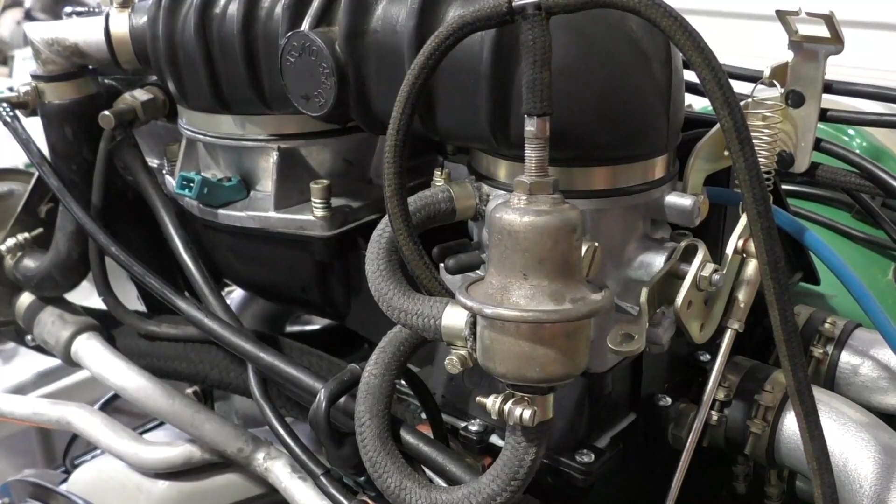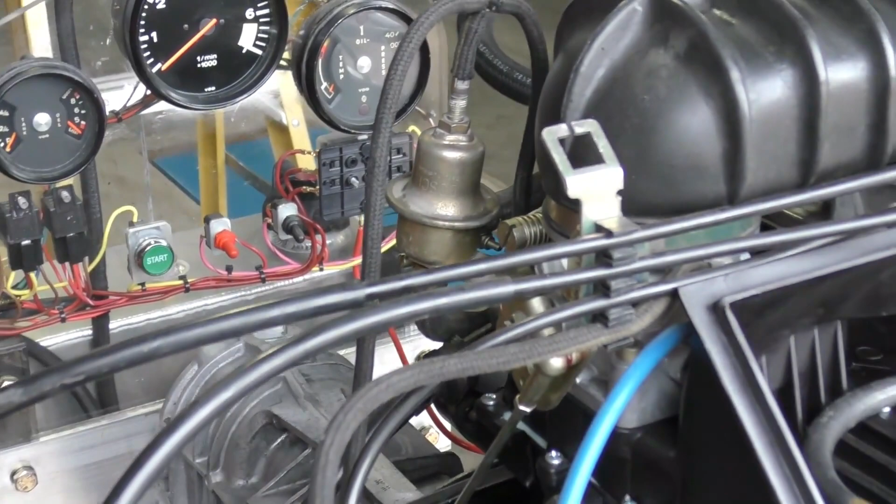Idle settings is another component that we have control over. We have two adjustments. We have our decel valve right here. This is there to stop the engine from stalling when it comes back to an idle. This is our actual idle air bypass screw right here. When I'm adjusting my idle, I'm screwing it in to reduce my idle, screwing it out to increase. It's the opposite of a carburetor. A carburetor is usually pressing on a throttle lever. This is actually allowing air to bypass around the throttle plate. And that's really about it. If you have your system pressure, your control pressure, your sensor plate height, and your fuel mixtures set up correctly, the system will operate as it was designed.

So we've let our engine sit overnight, and the last thing I want to do is check my cold start in the morning. My hot start was good. I've removed my fuel pressure gauges. I've put the air filter on, so let's go ahead and start it up.